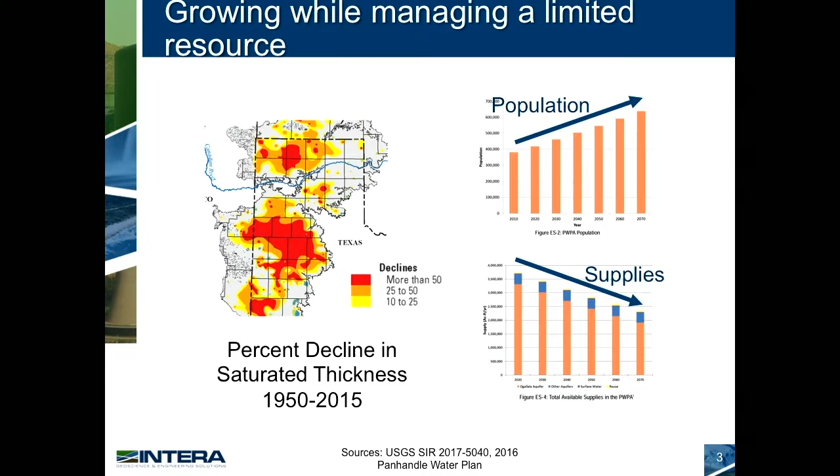So let's start with some of the challenges, just in this area. As everyone here understands, it's a limited resource. Actually, a declining resource, and at the same time, the region wants to grow. The challenge is that infrastructure is expensive, very, very expensive. And as we move to these new water management strategies, ASR, brackish water, other strategies, those are even more expensive.

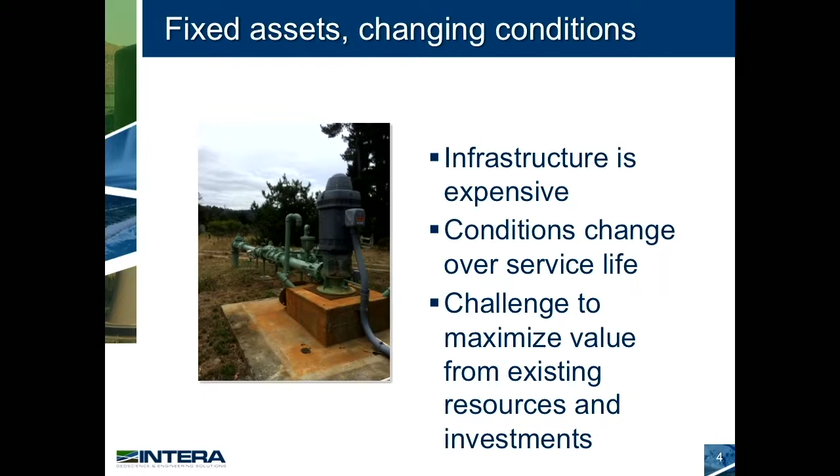Infrastructure also has very long service lives. You build a pipeline, well field, expect that stuff to last for decades and to be useful for decades. The trick is to build it and manage it so you can get the most value out of those long-lived investments over their entire life. The need for those big new future investments is always going to come, but the more that you can get out of what you have today, the more affordable water is going to be in the future.

So for a well field, here's how some of the conditions can change. Well performance and well field performance is kind of a moving target. You've got water level trends, water levels dropping in the aquifer. You've got changing demands, and you've got loss of efficiency in the wells. The day a well starts operating, it begins to lose efficiency. So all those things together result in the well operating under different conditions than when it was first put in service. And that can result in declining yield or increased operating costs.

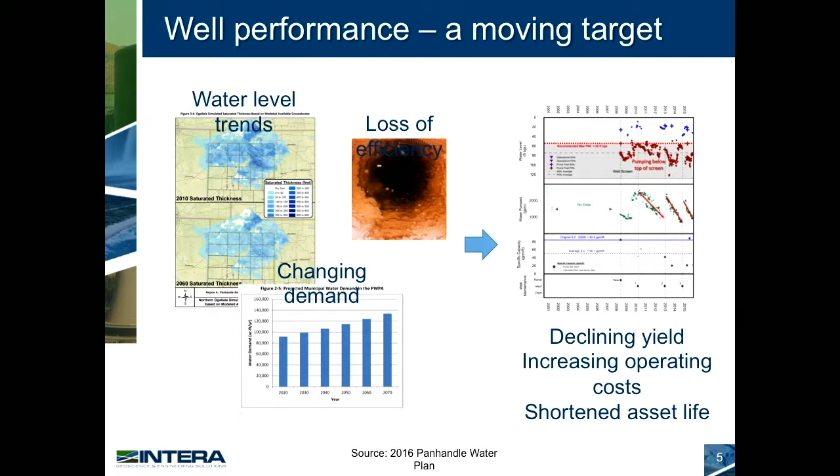It can also cause asset life to be shortened. If pumps start to operate where they shouldn't, they can fail sooner than they should. There's all kinds of questions to figure out: what's the best way to lay out a well field, given that these conditions are going to change over the future? How often should you really clean and rehabilitate your wells to make sure that they perform adequately?

I'll point out that groundwater assets are really unique in that it's an interrelation of these natural and built systems. You've got the aquifer system, and then you have this built infrastructure, the wells and pumps and pipelines. And the flow and water quality can also vary within a well. It's not necessarily the same everywhere down through the well bore.

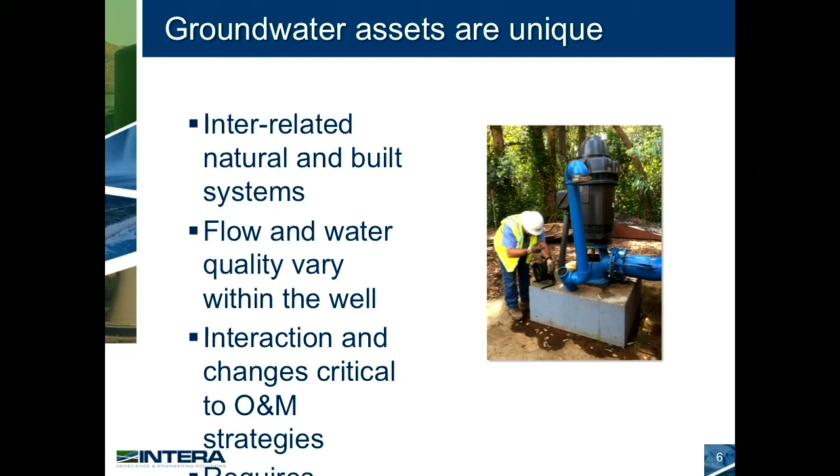These interactions, the way these things interact and the way they change over time, is critical to figuring out the right operation and maintenance strategies. The key to figuring this out when you have changing conditions like this is to look at your data.

Utilities generally have, from my experience, the data that we had on our well fields was variable. For some we had a lot of data, for others we didn't. It's in all kinds of different formats. You've got files full of paper. You've got your SCADA systems. There's pump tests, maintenance records.

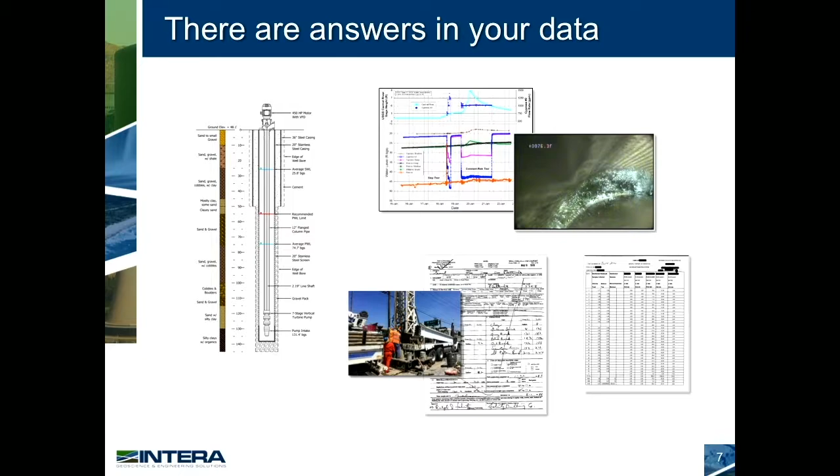There's all kinds of data available that can help you to figure out how to approach this. It's just a matter of getting it into the right format. The trick is getting it all together in an effective way that you can look at it and learn some things from it.

So this graph here on the left, this is a bunch of different data that came from paper records and pump records and things like that, and it was assembling water levels, well efficiency, flow rates, maintenance records, like when maintenance was performed, to kind of look and see how that well behaved over time. And you could start to see how quickly it would lose efficiency and what trends were,

and to use that information to figure out, over the life of that pump, over the life of that well, where is that thing likely to operate? Because it's going to be changing, and you want to make sure that you pick the right equipment to operate efficiently and effectively over that whole range.

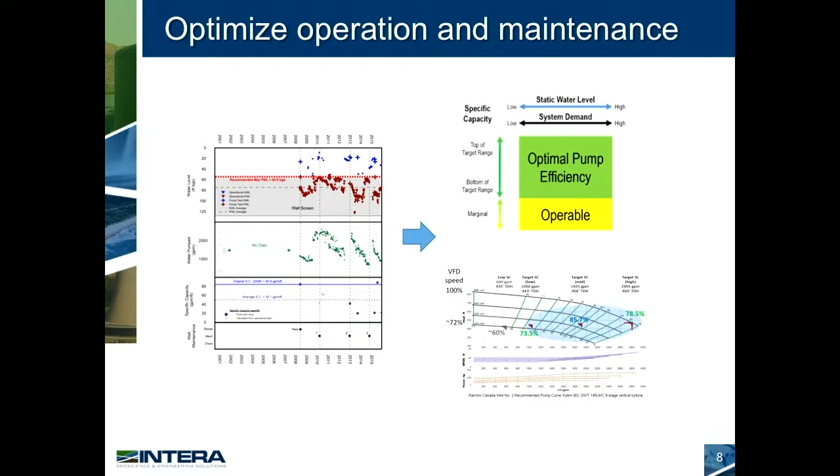There's good potential for getting really good results from taking this kind of approach. We have one project, this is for a utility in the West, they have a critical well field that they use to supply ASR operations. So they bank water from an alluvial aquifer during the winter to pump out during the summer.

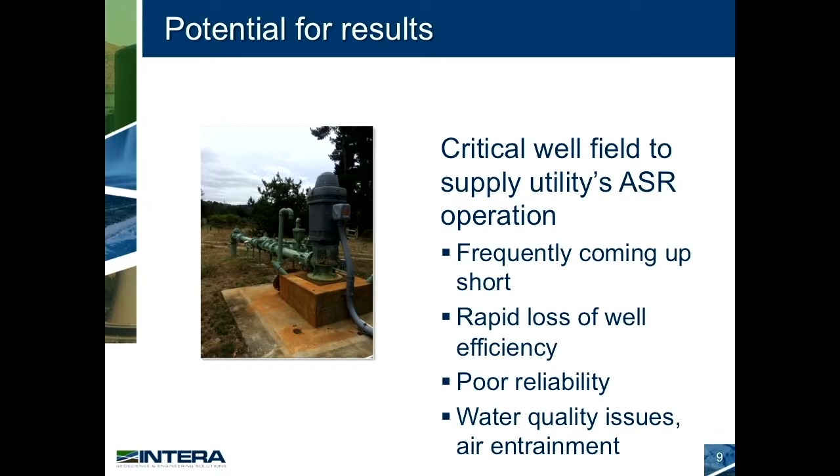And this well field, the problems they were having was frequently coming up short on the amount of water that they wanted to bank. Well efficiency was declining very rapidly, poor reliability, the pumps were failing, and they had all kinds of different water quality issues and air entrainment because of the way they were operating the well field. In addition to pump failures, they were also having to throttle valves and do all kinds of things that aren't really recommended.

So, through this process, collecting all this data on this small set of wells, there's only about 10 wells, we were able to figure out what the optimal pumping equipment would be during different seasonal changes in water levels, kind of in between cleanings of the wells when efficiency declines, and to establish some recommended maintenance triggers to help them figure out how to optimize the yield and minimize the life cycle cost.

And the first year after making some of these changes, they increased the amount of water they were able to store for ASR by 50%, which was a big win for them. By getting the right pumps in, they have started to save a lot of money on energy per million gallons pumped. And once they've finished changing out the pumps, they have the potential to save over $160,000 a year.

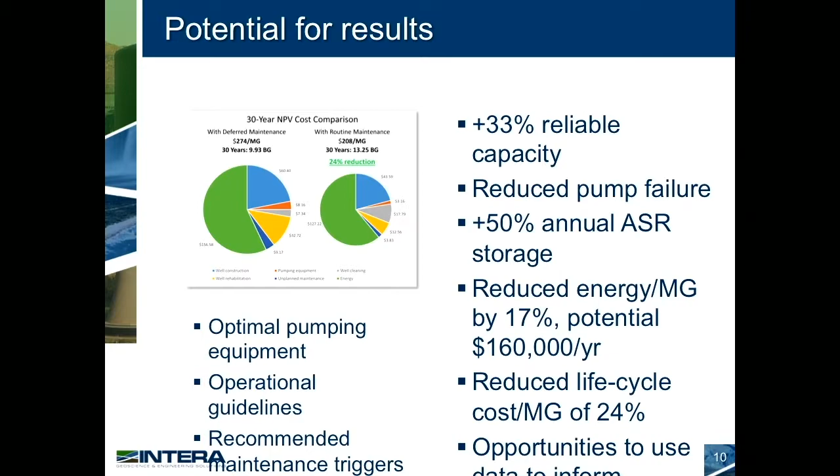And this is kind of clipped off at the bottom, but through this process and getting this data together, the operators were able to identify what data do they have that they're not pulling together that they could be looking at periodically to help them make these decisions about when to clean and when to maintain wells to get the longest life out of them.

Another area where it's possible to really get more out of what you already have is in optimizing source water quality. And this is something that I think has great potential.

I apologize, it's a different version of PowerPoint, I think, and some of the letters got moved around.

Intera works with a company called BESST and also Field Data Solutions in Texas and a couple neighboring states, Oklahoma. And what this technology is, it's flow profiling. Dr. John Izbicki with BESST was the inventor of this process for the USGS that uses pulse dye tracing and water sample collection to basically collect flow and water quality data all through the well bore.

And this can be done while the well is in service. So see the vent or the access pipe there. The instrument can be dropped down through there. It injects NSF approved dye and takes water quality samples as it's being pulled up. And then the analysis of that data provides a profile of how much water is coming in where on the well and what the water quality is.

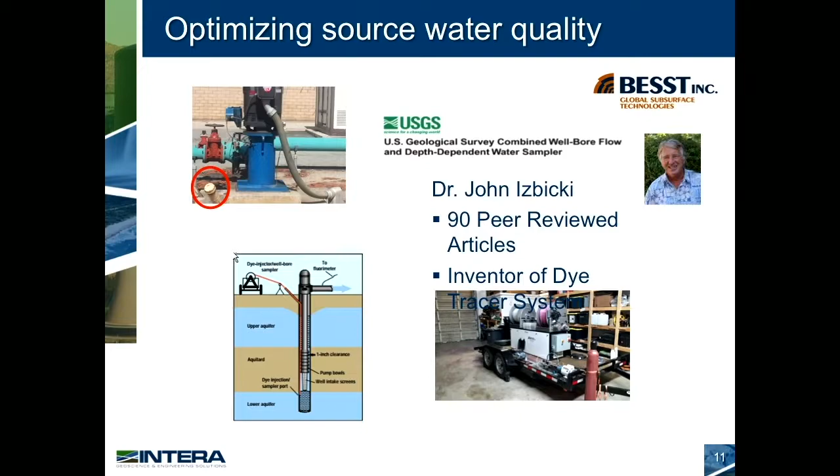So say you have a well that's got arsenic levels that are increasing and you're looking at maybe having to build a treatment facility, that could be quite expensive. What's possible with this technology is to figure out, because the flow and the water quality from these different depths in the well are not the same.

And if you look at the two areas that are circled there, the red lines, this is for iron. The red lines are the iron concentrations at those two intervals in the well. Those two intervals also don't contribute very much water at all. So they can be blocked off, and the iron can be reduced significantly without really affecting the yield.

So this could be arsenic or TDS or chlorides or whatever it is that might be causing you to think, oh, we're going to have to blend this or treat it or do something that's going to cost us a lot of money. There may be an opportunity to go in and modify the well to avoid having to do that.

Another way that this technology can be used, that I think is important, is also just maintaining the wells. When a well is first developed, because water is not entering the well bore uniformly, it's coming in different places, this technology could be used to test to see if a well's fully developed, and then later, when it's being cleaned and rehabilitated, it could be used to see where the problem areas are.

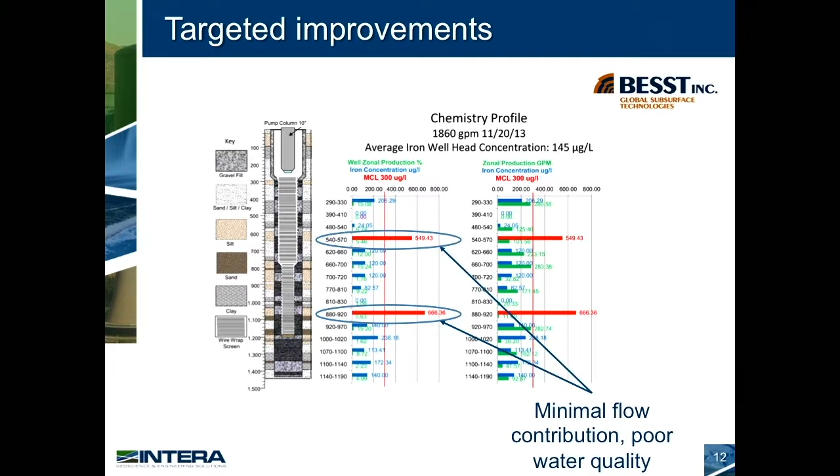So, all of these things together, the analysis to optimize the hydraulics and the maintenance of the wells, looking at whether you can fine-tune the water quality enough just to avoid having to build that treatment plant. All these approaches are geared towards making the most out of the investments that you already have in your infrastructure, making the most out of the resources that you've already developed, and also to make smart new investments.

If you're developing a new well field, you may decide to complete a well slightly differently if you find out some things about the water quality that could end up reducing your treatment costs long term.

So we all know there are big investments in water infrastructure that are going to have to be made over the coming decades, and all this stuff is expensive, and the newer management strategies are just more expensive. And so, again, what I like to see utilities do is get the most out of the infrastructure and the resources that they have, because your customers need to be able to pay their water bill.